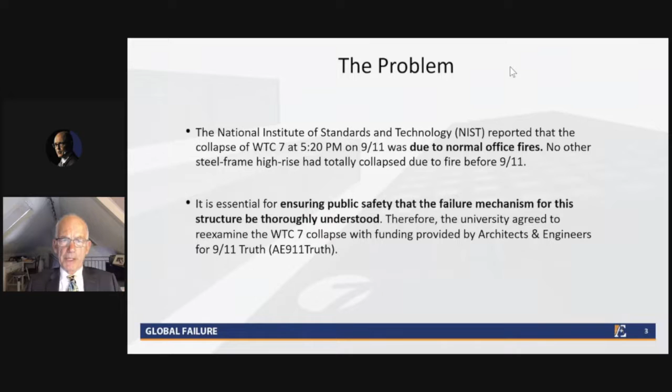The reason we wanted to study this building is because there was a serious problem. The National Institute of Standards and Technology reported that the collapse of the building at 5:20 that day was due to normal office fires. However, no other steel-frame high-rise had totally collapsed due to fire prior to that date or since. So it's essential for ensuring public safety that the failure mechanism for this structure be thoroughly understood. The university agreed to re-examine the collapse, and we provided the funding.

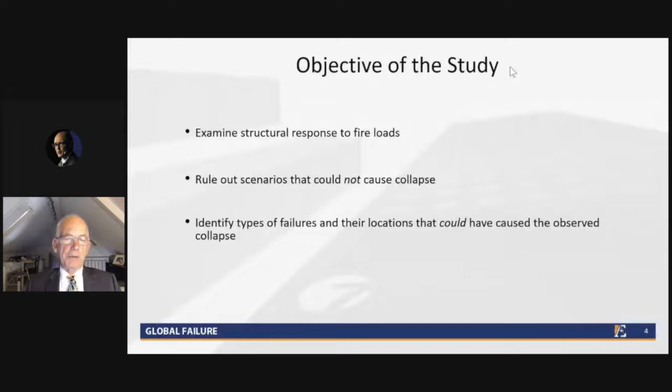The study had 3 objectives. First, examine the structural response to the fire loads. Second, rule out scenarios that could not cause the collapse. And third, identify the types of failures and their locations that could have caused the observed collapse.

The material properties utilized were the same that NIST used, and we validated those: A36 steel, A572 steel, and 3,500 psi concrete.

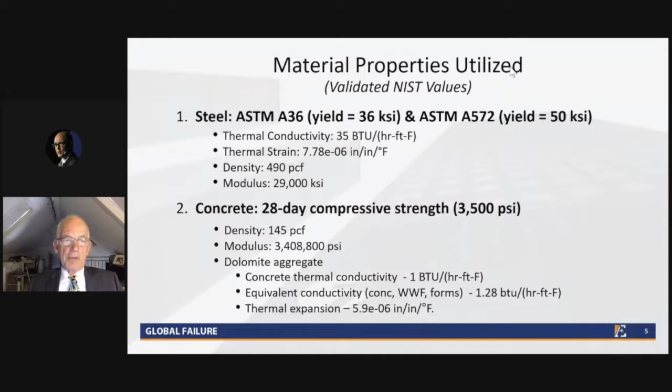The methodology used three approaches: simulate the local structure response to fire loading on floors 13 and below where the fires were; examine the collapse initiation hypothesis developed by NIST, as well as collapse hypotheses advanced by private engineering firms whose studies were commissioned as part of litigation related to the collapse; and third, simulate several scenarios within the overall structural system to determine what type of local failures and their locations may have caused the total collapse to occur as it was observed.

There were two official reports on the building failure. FEMA issued a report in May of 2002, which was a preliminary report that just reported on the evidence that had been found and suggested some possible avenues of investigation. NIST issued their report, as Richard mentioned, later in 2008.

In addition, there were privately funded reports for the lawsuit. The Arup Group issued a report for the plaintiffs, Con Edison and their insurance company, in their lawsuit against WTC 7 Properties. Their report was released with the publication of the Second Circuit Court of Appeals decision in December of 2013, ruling in favor of the defendants.

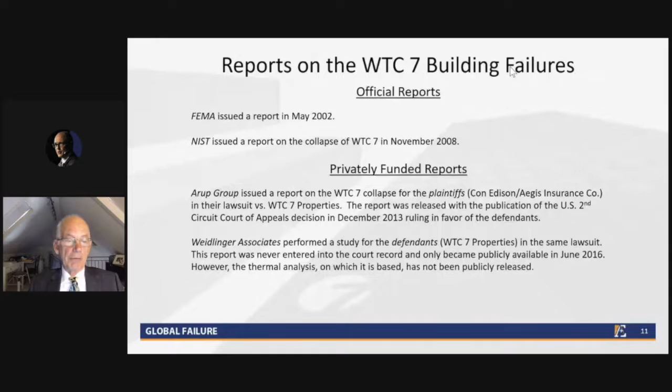The Weidlinger Associates performed a study for the defendants in the same lawsuit. However, this report was never entered into the court record and only became publicly available in June of 2016. The thermal analysis on which it was based has not been publicly released. Then there's our study, funded by AE 911 Truth, performed by the University of Alaska Fairbanks Department of Civil and Environmental Engineering, and that report was just released.

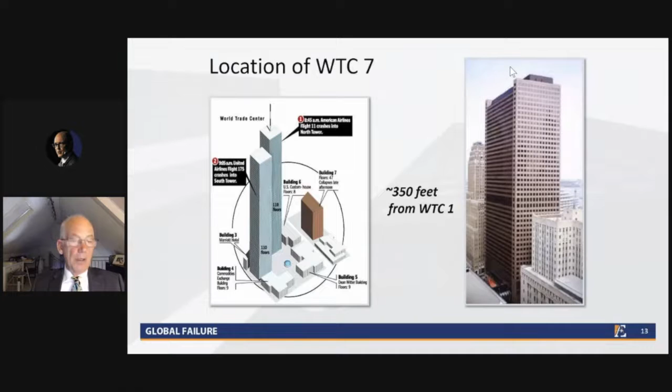The building was located about 350 feet north of World Trade Center 1. It was a 47-story high rise. Each floor was about 1 acre in area. Here again, we see it from the north.

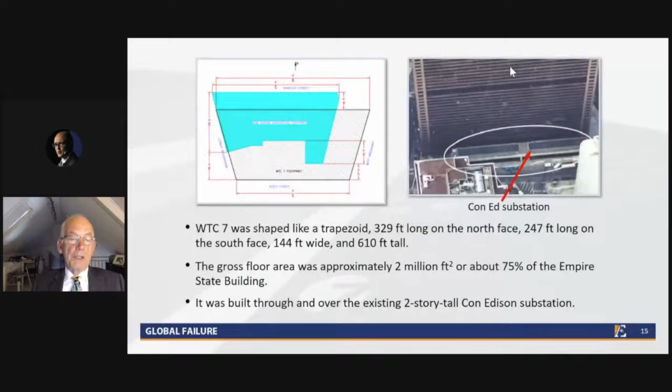It was shaped like a trapezoid, with the long side on the north side of the building and the short side on the south side. That's important to remember. It was built over the Con Edison substation, a 2-story high building that they erected the building over.

The foundation caissons, some of them went through the Con Edison substation, and some of them attached to the caissons that were already through the Con Edison substation.

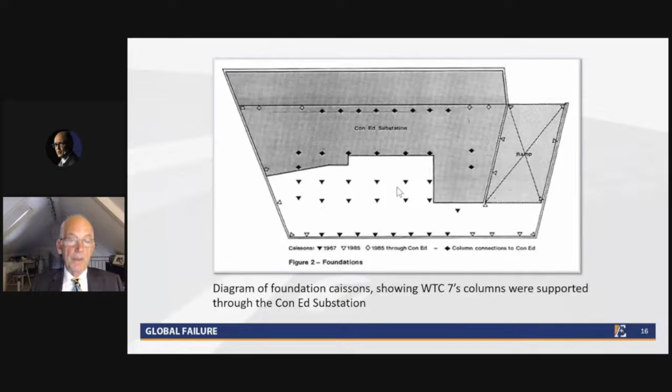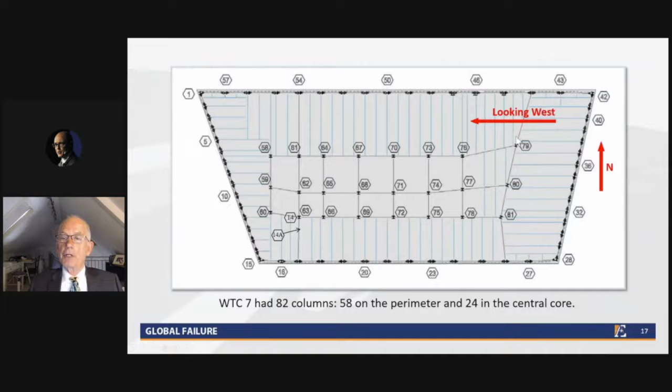During construction, we can see the arrangement of the columns here, the perimeter columns, the girders that connect the perimeter columns, and the framing between the perimeter girders and perimeter columns. The core columns are here, and they surround the area of the elevators and the stairwells.

The core columns and the perimeter columns are connected by a steel deck, with concrete covering.

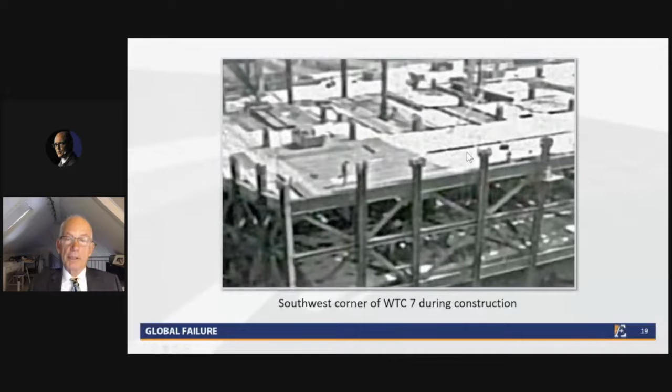7 hours after the Twin Towers came down, the building, which wasn't hit by a plane, collapsed and turned into a 5-story pile of rubble in about 7 seconds. Notice again, this is from the south, so here's the east penthouse, the west penthouse.

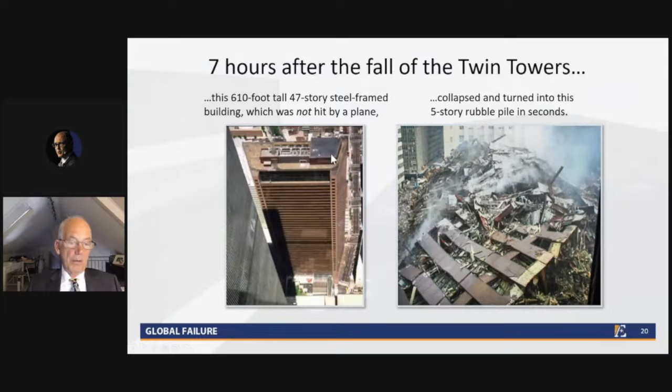In this series of videos, these were started after the west penthouse had fallen through the roof of the building. When this video starts, the penthouse is already gone. That's true in all the videos we're going to watch here. We'll see a longer video later that shows the entire process, but this shows the building coming down.

For the third time today, it's reminiscent of those pictures we've all seen too much on television before, when a building was deliberately destroyed by well-placed dynamite to knock it down.

Did they actually use the word brought down, and who was it that was telling you this? The fire department, and they did use the word, we're going to have to bring it down.

We heard this sound that sounded like a clap of thunder. It looked like there was a shock wave ripping through the building, and the windows all busted out. About a second later, the bottom floor caves out. The building followed after that, and we saw the building crash down all the way to the ground.

And I turned in time to see what looked like a skyscraper implosion. Looked like it had been done by a demolition crew. The whole thing just collapsing down on itself. It was almost as if it were a planned implosion. It just pancaked.

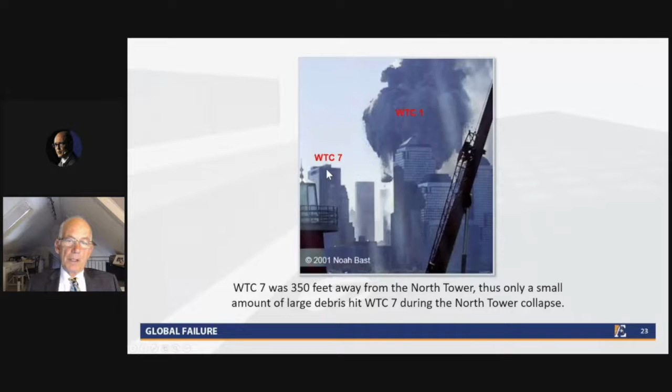The light debris from Building 1, the North Tower, hit the southern face of Building 7. FEMA mapped that debris pattern here, and we can see that some of it did, in fact, impact the south wall of Building 7.

NIST gave us a pictorial view of that damage as they interpreted it. There was damage in the lower southwest corner of the building and some damage to the upper floors on the middle of the south side. NIST stated that this debris damage had little effect on initiating the collapse.

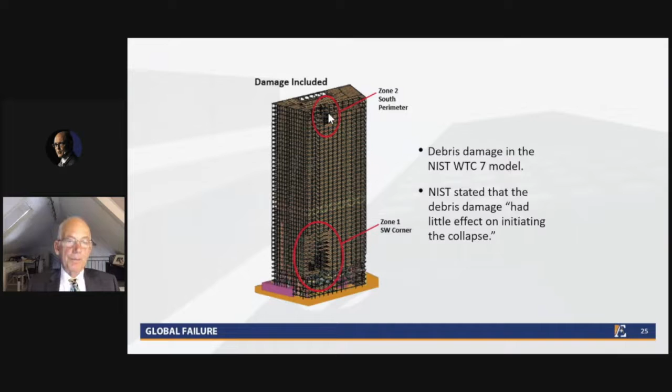Some photos taken during that afternoon. Here's one at 2:11 of the east wall of Building 7, and here's one at 3 o'clock of the north wall. We can see the fires are active at that time.

FEMA thought that maybe there was diesel fuel involved in the fires. There were some auxiliary generators for backup power on the 5th floor. These were louvers for that air intake, and there was no smoke coming out of that. So the conclusion was that the diesel fires had nothing to do with the collapse of the building.

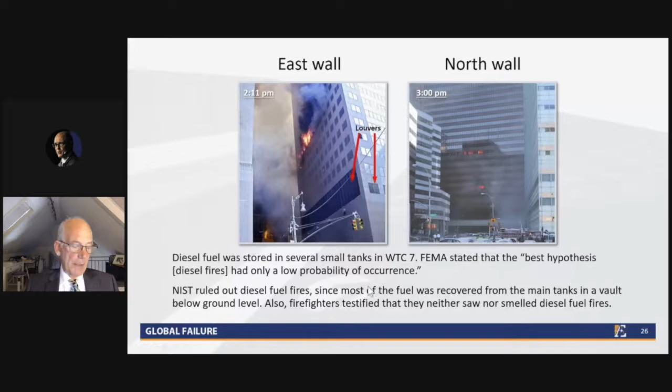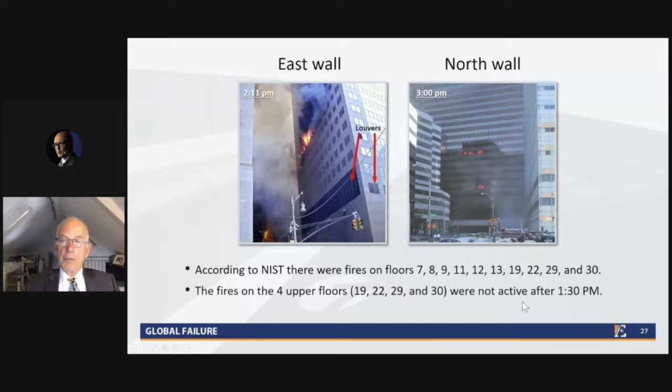NIST claims, and the evidence shows, that there were fires on the 7th, 8th, 9th, 11th, 12th, 13th, 19th, 22nd, 29th, and 30th floors. However, the fires on the upper 4 floors were not active after 1:30 p.m. and were thought to have nothing to do with the collapse of the building.

This is a view of the north face of the building, taken about 90 minutes before it collapsed. We can see that there are fires active on the 8th floor here, apparently working its way from west to east. Up on the 12th and 13th floors, we can see that fires are still active. On this floor, the fire is working its way from east to west, and same thing apparently with the 13th floor. We can see that there's still some fires active around column 44, which is of interest to us.

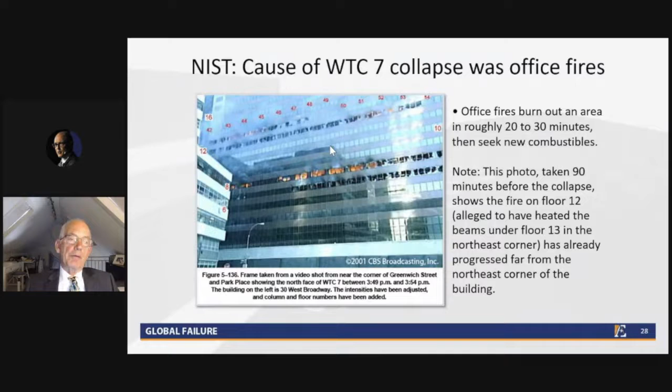It's important to remember as far as office fires go that they depend upon office furnishings for their fuel, and they burn out areas in roughly 20 to 30 minutes because they run out of fuel. So they have to move. And we see that that's what's happening here.

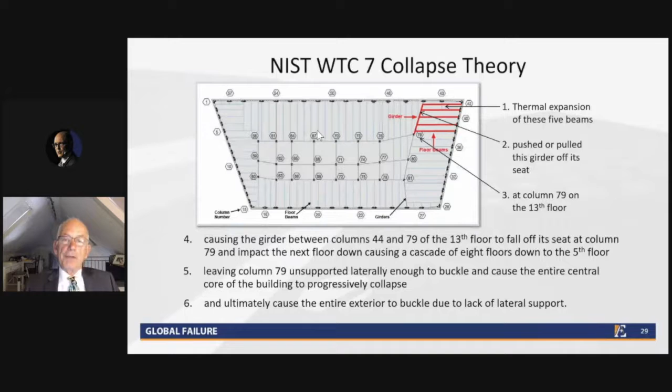The NIST collapse initiation theory starts with the 13th floor, in the northeast corner of the building, with these 5 beams that frame into this girder, A2001, that runs between column 79 and column 44. They say that the thermal effects on those beams cause them to expand and contract later, and that either pushed or pulled this girder off of its seat and caused it to collapse.

That collapse on the 13th floor caused the girder to hit the 12th floor down, and that in turn caused a cascade of these beams in this area all the way down to the 5th floor, causing column 79 to buckle because it was unsupported for such a long distance. That in turn led to the buckling of 80 and 81, and these 3, 76 through 78, buckling, with the collapse proceeding from east to west of all the core columns, which then resulted in the collapse of the perimeter columns, leading to the global collapse.

So that's their theory. It's a progressive theory. In other words, one event, the expansion of the beams, led to another event, the pushing off the girder, led to another event, the falling of the floor, led to another event, the cascade of floors, led to another event, the buckling of column 79, and then the buckling of adjacent columns, and then the buckling of all the perimeter columns. A progression of events, an initiating event.

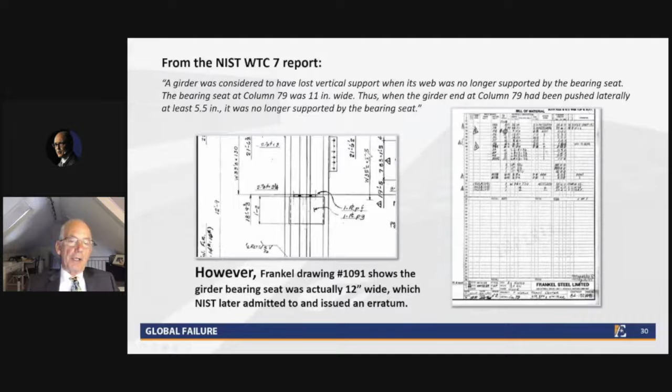We're going to look at that analysis. Their report said that the initial event was the girder, A2001, being pushed off of its seat at column 79. This is the drawing of column 79 and shows the beam, the girder seat, which was supported by a plate that was welded to column 79, being attached to the column.

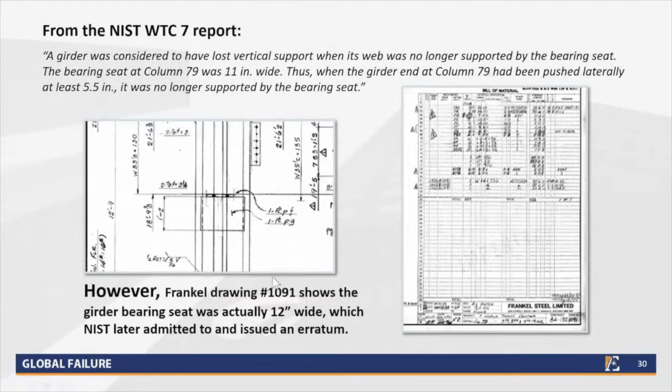They said that that seat was 11 inches wide, only 11 inches wide. However, the bill of materials and later investigation showed it was 12 inches wide, which is a somewhat important fact considering that they're saying the girder was pushed off of that seat. So that's why that's important.

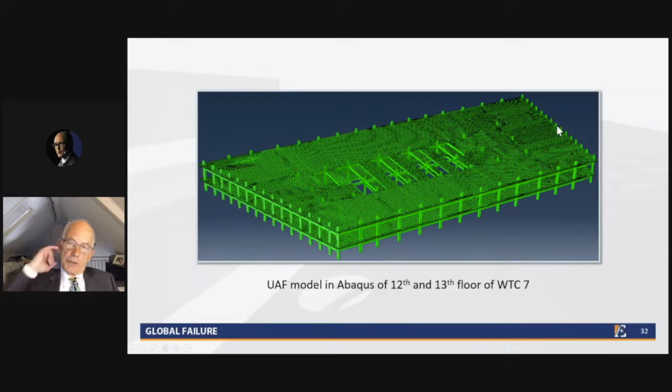Now that assumption that NIST made runs counter to the findings that Professor Hulsey had. So that's an important fact to remember as we go on and investigate the differences.

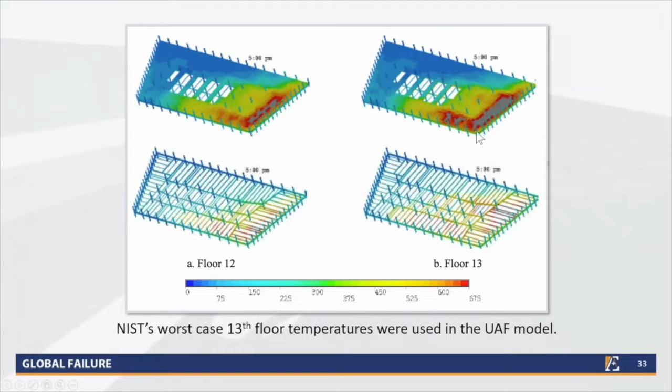Here's the worst case floor temperatures that were used for the 12th floor. NIST shows these temperatures, which are color coded. You can see that their maximum temperature down here is about 675 centigrade, which is over 1200 degrees Fahrenheit. Then this is the floor framing underneath that concrete pad, and same thing for the 13th floor here. You can see that in both cases, the maximum temperature that NIST found was in the area of the eastern part of the building.

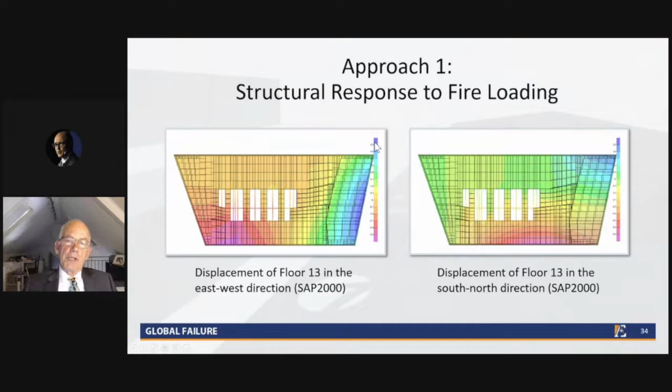In approach 1, the UAF team looked at the structural response to the fire loading. The displacement of the 13th floor in the east-west direction is shown here. The purple is the greatest displacement, and we see that occurred on the east end of the building. In other words, the UAF team found that this wall moved about 5 inches or more to the east.

That's in contrast to NIST. Remember, they said that whole perimeter wall remained fixed. When we look at the north-south direction, we see that the maximum north direction was about 3.5 inches in the UAF model, and that occurred in the northeast corner of the building.

They used 2 different finite element models to mimic the behavior of the building. The SAP 2000 analysis showed that the X displacement, in the east-west direction of the floor at column 79, was almost 2 inches, about 1.9 inches. And in the north-south direction, it was about 3/4 of an inch to the north.

So in other words, they're saying that the floor displacement at column 79 was about 2 inches to the east and about 3/4 of an inch to the north. They also found that the westward displacement of the girder relative to column 79 was less than 1 inch, which differs substantially from the 6 1/4 inches of westward movement found by NIST.

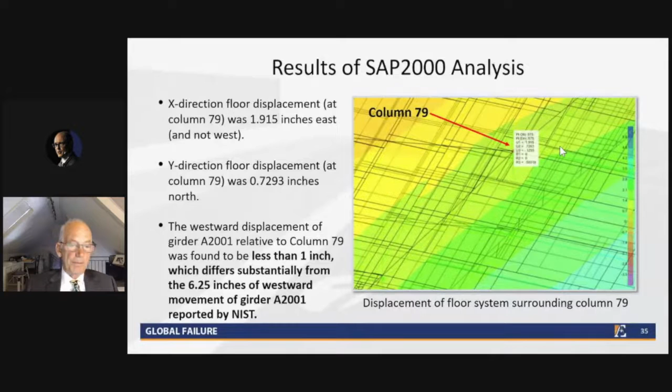The ABAQUS analysis, which was used to check the SAP 2000 analysis, so that we could compare and see if we're getting consistent results, showed that the X direction of the floor displacement was 1.85 inches, and in the north direction was 0.94 inches. That's very close to what the SAP 2000 results were.

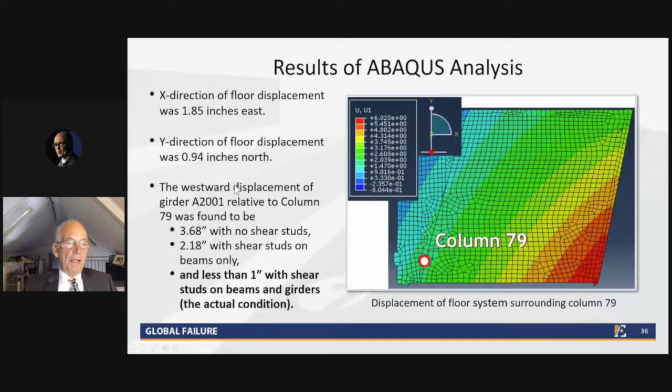It's found that the westward displacement of the girder relative to column 79 was 3.68 inches with no shear studs on the girders or the beams, 2.18 inches with shear studs on the beams only, and less than 1 inch with shear studs on both the beams and the girder, which was the actual condition.

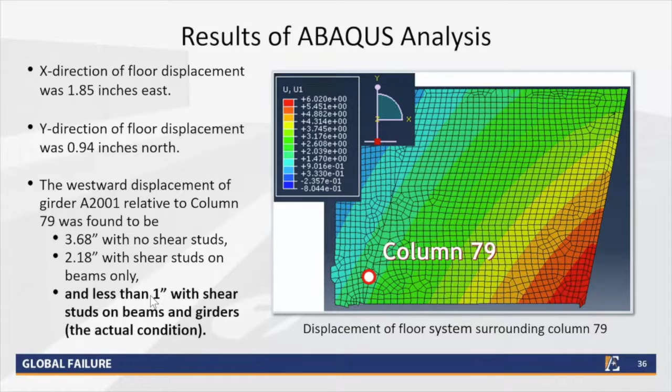The reason why those other modalities were examined was because there were some claims by NIST and other examiners as to whether or not there were shear studs on the beams and on the girders, and that made a difference on how the structure reacted.

The ABAQUS analysis was checked against the NIST boundary conditions with no spatial restrictions, and found that the westward displacement of the girder relative to column 79 was 5.11 inches. This was an attempt to replicate NIST's findings.

But we found it was a full inch less than the 6.25 inches of westward relative displacement that NIST reported, and nearly an inch less than the 6 inches westward displacement, which would have been required to push the web of A2001 past its 12-inch seat at the column. So we were unable to replicate NIST's results, probably due to the difference in input values and assumptions.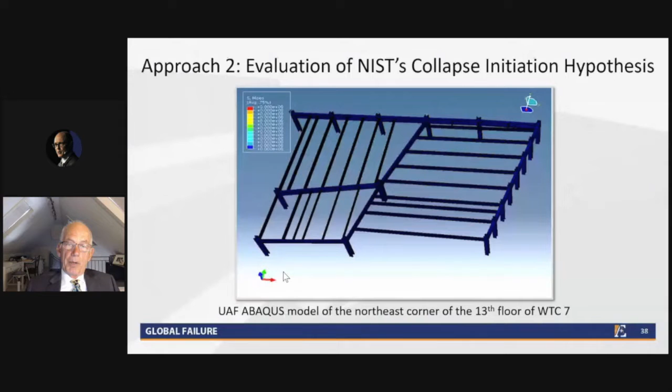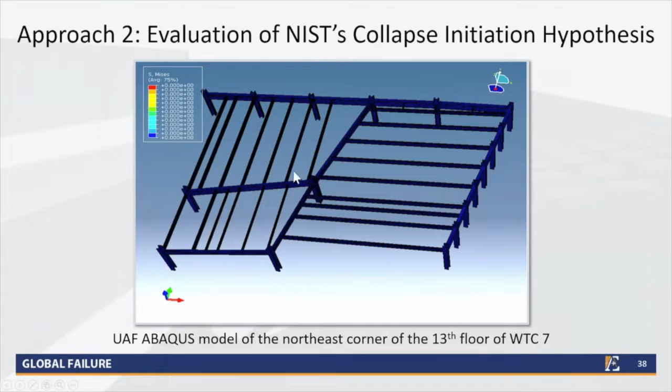Second approach was to evaluate NIST's collapse initiation hypothesis. Here we see the ABAQUS analysis: column 79, girder A2001, column 44, the 5 beams, and the 2 girders framing in from the west and from the south.

Looking at column 79, we see that it had 2-inch thick side plates that were welded to the column at the 13th floor, and they protruded past the corners of the column by 1.8 inches on each corner.

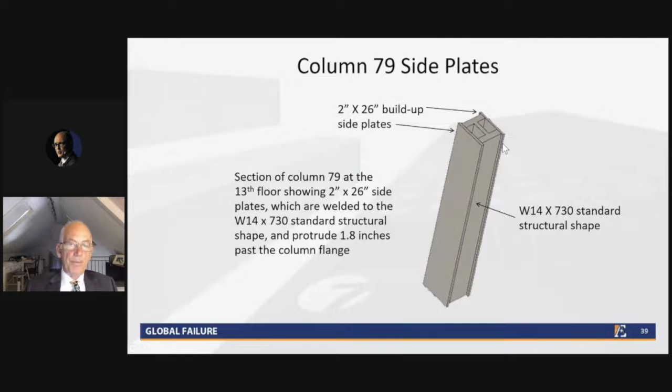The ABAQUS analysis of UAF showed that with the beams heated to 600 degrees Celsius, and the girder heated to 500 degrees Celsius, the beam would push the girder to the west, but the girder would elongate and be trapped behind the side plates. Somehow NIST doesn't take those side plates into account. Although they showed them on some of their drawings, they don't explain how it got past the side plates.

So that's the first problem. Second problem is that the girder, as shown in the NIST report, looks like this. Here's the web, here's the bottom flange, it's attached with some clips, and here's the seat underneath it supported by

its plate. The problem with that drawing and that replication is that there was a 3/4 inch thick stiffener plate welded to both sides of the web, and you can see that here. Welded all the way around to the web and to the flange, the bottom flange. Well, that's going to make a big difference on how that girder is going to behave when it's pushed to

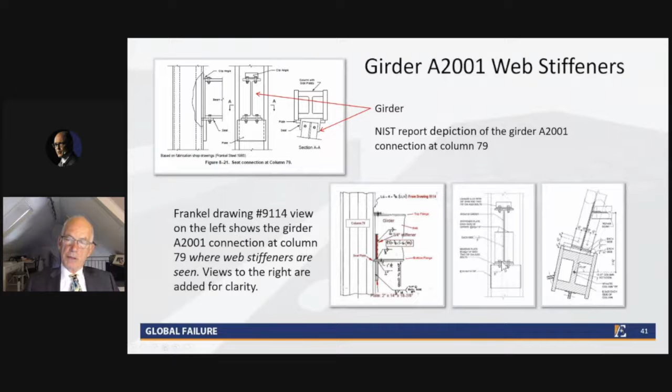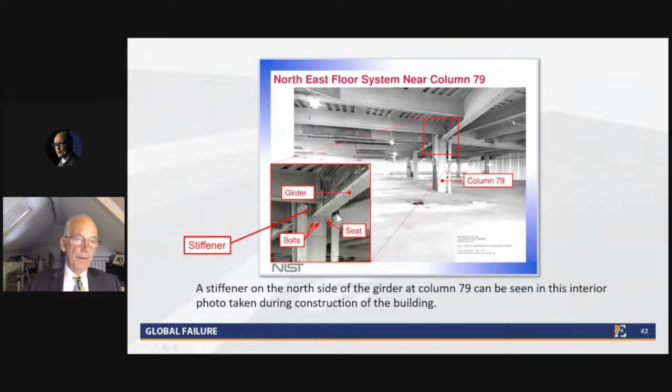the west, because the NIST analysis depends upon this flange folding up due to lack of stiffness when the web moves past the corner of the seat. However, putting those stiffeners in there makes a huge difference in the strength of that bottom flange, so the curling up wouldn't occur. We know that the stiffener was there because there are photographs taken during construction showing the stiffener welded to the girder. Here's a graphical representation: the girder, the column, the stiffener plates, the beam framing into the girder, the girder seat, and the plate that's welded to the column.

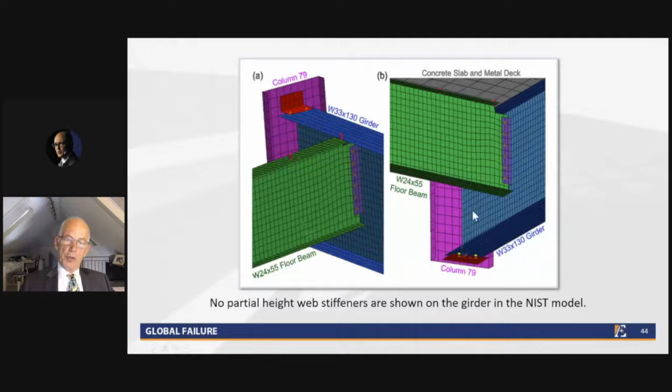The NIST analysis left the stiffeners off. So here we see their analysis: the beam, the girder, the column, and here we're looking at it with the column removed, and there's no stiffener plates on the girder. They admitted that they left the stiffeners off because they said that the web crippling, which they were designed to stop, didn't occur. So they didn't need to include the stiffeners in their models.

Now that is an analysis that would not stand up in any engineering class, and I'm sure that that's why they had Michael Newman, a public affairs officer, sign that statement and not an engineer.

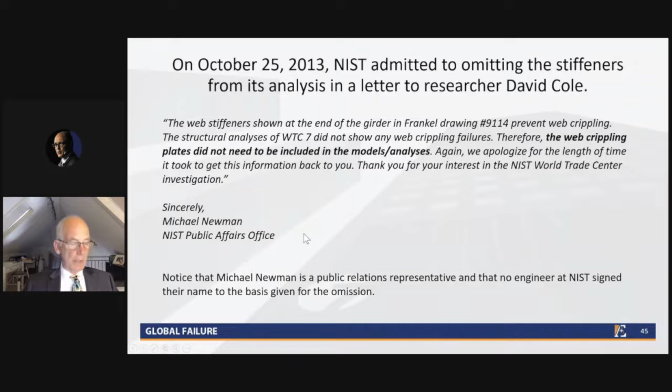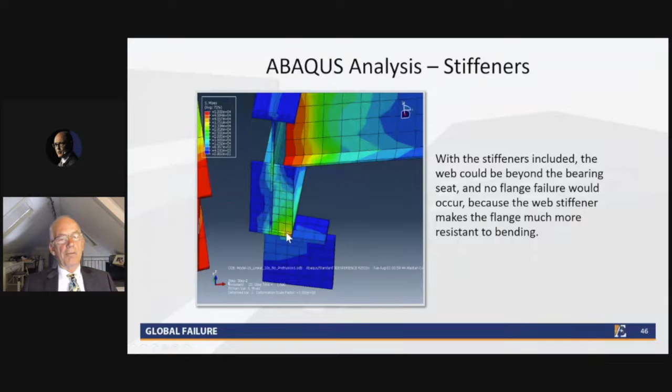We see here that in the Abaqus analysis, with the stiffeners included, even if you took away the side plate on the column, let the beam push the girder so that the web is well past the corner of the seat, the flange doesn't fail. So that's the next problem that they had.

Going further, if you allow the girder to fall, to see if the next step is going to occur, here the girder is allowed to fail, falls down, hits the 12th floor below, and it would hit the same girder on the 12th floor, A2001, near column 79 on the 12th floor.

You can quickly calculate how much force it would take to break that floor loose, and it would take 632,000 pounds of force to break that A2001 loose on the 12th floor.

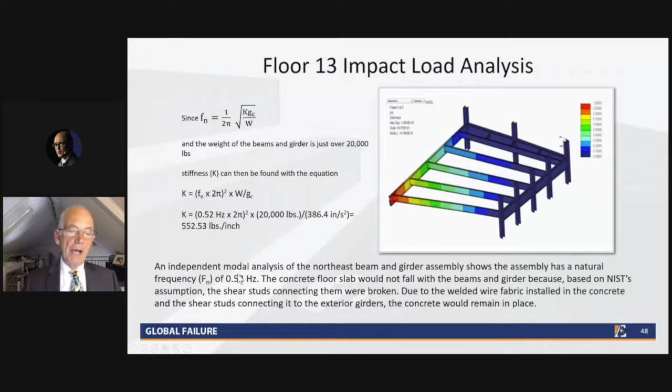When you analyze that load, you find, first of all, that the frame is going to separate from the floor slab and operate independently, because supposedly all these shear studs have been broken and it's allowed to fall. It has a frequency of about half a hertz, and utilizing that information, you can put that information into this equation and find the stiffness of this system, which turns out to be about 550 pounds per inch.

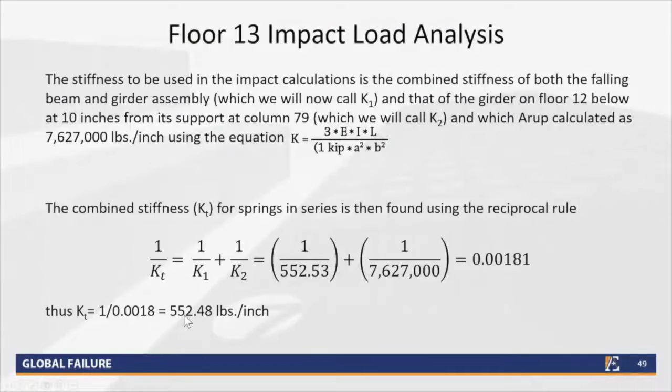And then utilizing that, you can find the stiffness of the entire system, that is the floor falling and the floor beneath it, turns out to be almost the same because the floor below it is so stiff. And then you can use the potential energy at impact of about 3.5 million inch-pounds, which was found by the Arup group, and we verified that and put that into an equation and find the deflection of the

frame system once it hits the lower floor. It turns out to be about 112 inches. And then using that, you can calculate the impact force, which turns out to be about 62,000 pounds, which is only about 10% of what you would need to break the welds loose at the girder support plate below. So this would indicate that the 12th floor below would not fall and the cascade couldn't happen.

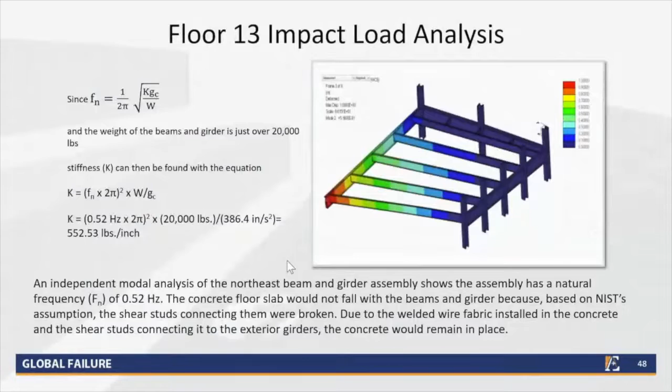Now, it's important to note that the NIST report kind of hedged its bets here and said that, well, maybe it wasn't the floor below, that it wasn't the girder below that fell. Maybe the other girders were knocked loose. In other words, the south girder coming into the column or the west girder coming into the column.

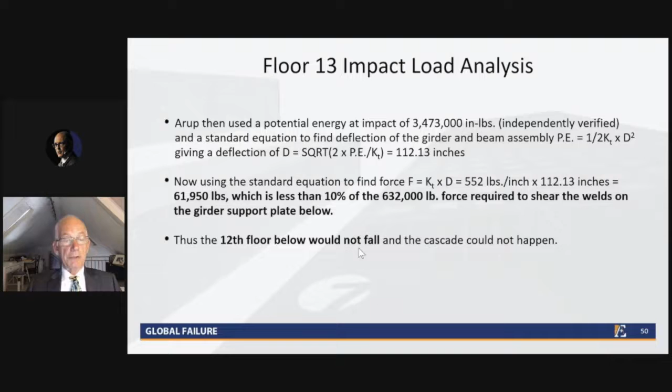They even had a scenario where the south girder coming into the column broke loose at the 14th floor, but they don't provide any information to explain how those connections failed. And without an explanation, those scenarios are not credible.

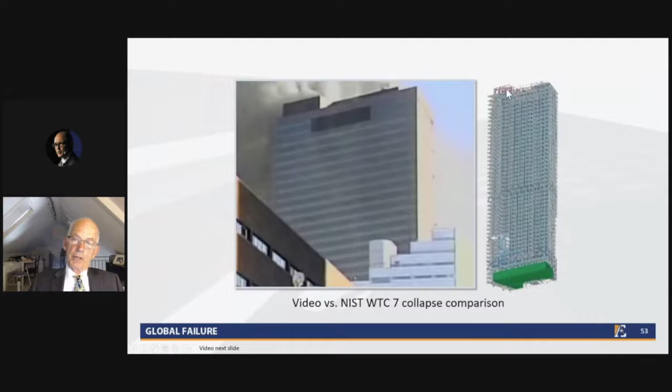Now we'll compare that to the NIST simulation. On the right, you'll see their simulation starts with the collapse of these floors down here in the northeast corner of the building, low down at the 13th floor, and watch how that affects the east penthouse up above. That's very important. There's the collapse. The east penthouse falls through, then the west penthouse, and then the building starts to collapse.

However, the NIST simulation doesn't go any further than that. So it's suspect, because the building has already started to deform significantly on the exterior, on both the west side and the south side, upper and lower.

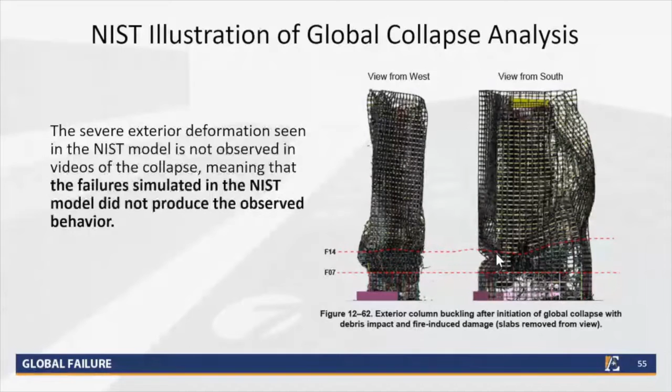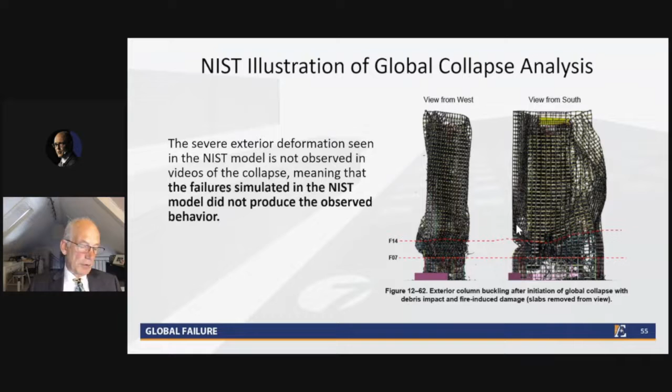In their report, they show what the view from the west would look like into the collapse, and from the south, and you can see that the distortion of their building is considerable in their model. So that doesn't match the observed collapse. It can't be used as a model to explain the collapse if it can't match the collapse.

So that is a major sticking point with the NIST analysis. How do they get that penthouse to collapse when they were collapsing the floors way down low in the building? UAF analysis said that could not happen.

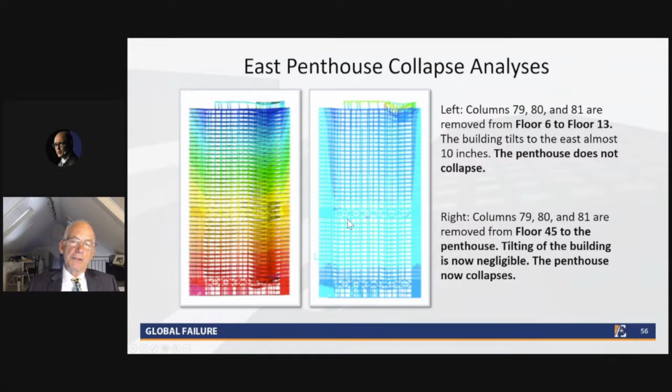Then we'll look at their horizontal core column failure scenario. They said that when these three columns fail, first 79, then 80, then 81, that would lead to a collapse of the next three columns, 76, 77, and 78. And that would in turn set off a progressive collapse across the core columns, which would then lead to the collapse of the exterior columns.

The UAF analysis found that when you take out those six columns, 79 through 81 and 76 through 78, what happens is that these columns here in the southeast corner of the building are overloaded and fail. And when they fail, that leads to further failure of some more of the east columns, one column over here on the west side, then the other core columns start to fail, and some of them even on the north side begin to fail. So they don't find the same sequence.

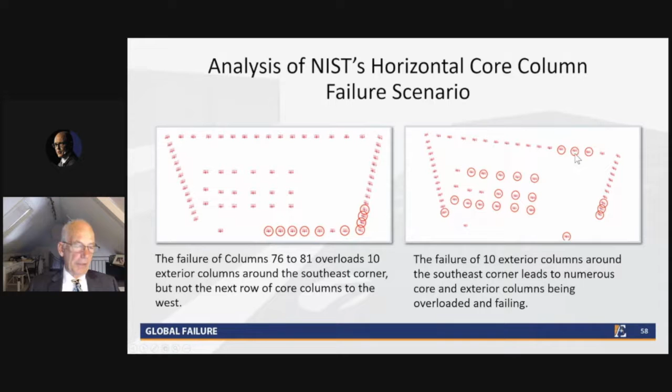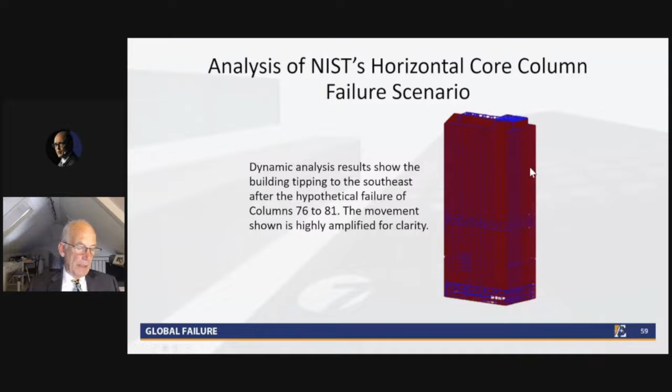When you look at how that would appear, the building would tip to the southeast after the typical failure, hypothetical failure of 76 to 81. So this analysis shows that the failure would not look like the failure that actually occurred. It would look like this.

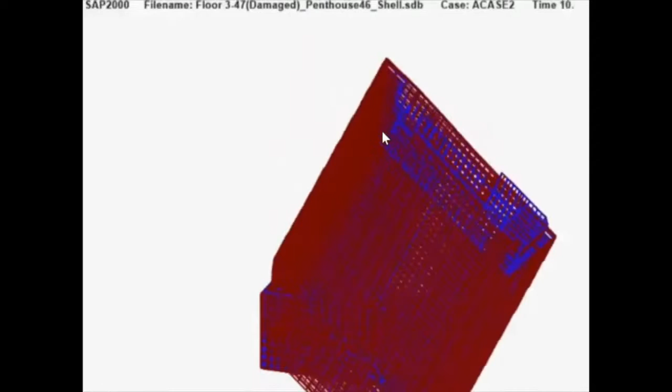Notice that the east penthouse is still intact. The building falls over to the southeast. So even if you gave NIST their collapse initiation hypothesis, of the girder falling off and the floors collapsing and the column collapsing, you don't get a scenario that looks like the building when it actually collapsed. The building would fall over to the southeast.

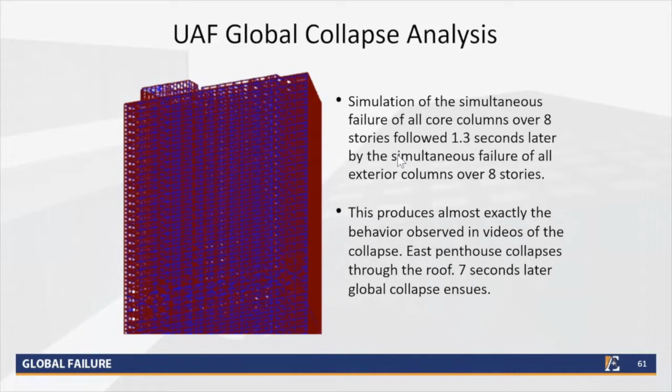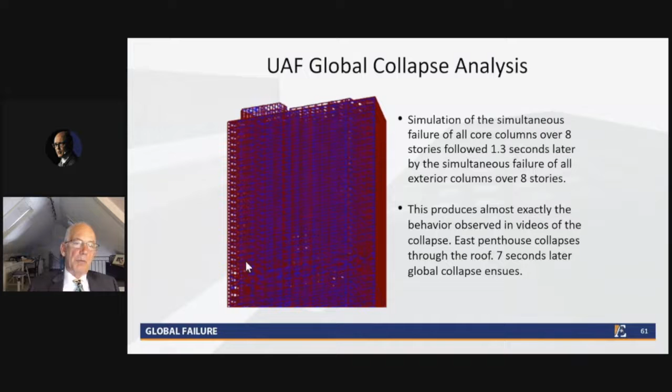The UAF global collapse analysis said you had to simulate the simultaneous failure of all the core columns over 8 stories, followed 1.3 seconds later by the simultaneous failure of all the exterior columns over those same 8 stories, to produce exactly the behavior observed in the videos of the collapse. Now the east penthouse has to collapse through the roof 7 seconds later, and then global collapse ensues. So what you have to have is a separate event up here: columns 79 through 81, which supported the east penthouse, have to collapse up here first, and then the global collapse down low of all the core columns, and then the perimeter columns 1.3 seconds later. If you do that, you can get the collapse the way it looked in the event. So let's do that.

There goes the east penthouse. The columns underneath it failed. Then the core columns down low fail, and then the perimeter columns fail, and the whole thing drops. One more time: east penthouse, and the west penthouse when the core columns collapse, and then the entire building coming down. So that was the only way UAF could replicate the appearance that the actual event showed us.

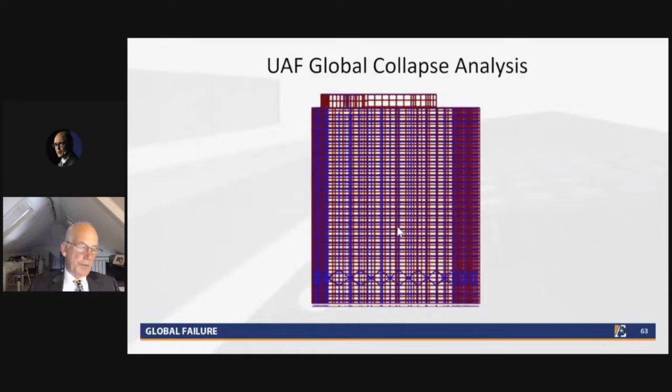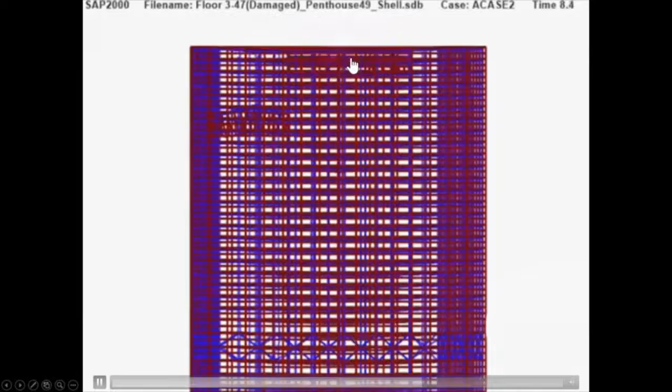Here you see it from another view. East penthouse, west penthouse, and then the building. There's a long gap between the east penthouse failure, 7 seconds, and the rest of it.

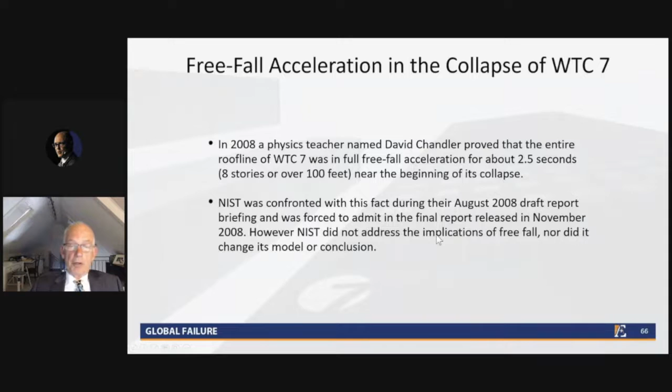So the next question we addressed was free fall acceleration, because physics teacher David Chandler proved that the entire roof line of the building was in full free fall acceleration for about 2.5 seconds, which is how long it would take to fall 8 stories. NIST was confronted with this fact in their preliminary draft report in August of 2008, and they were forced to admit in the final report that it did fall for 2.5 seconds, but they never addressed the implications of free fall, or changed their model or conclusion.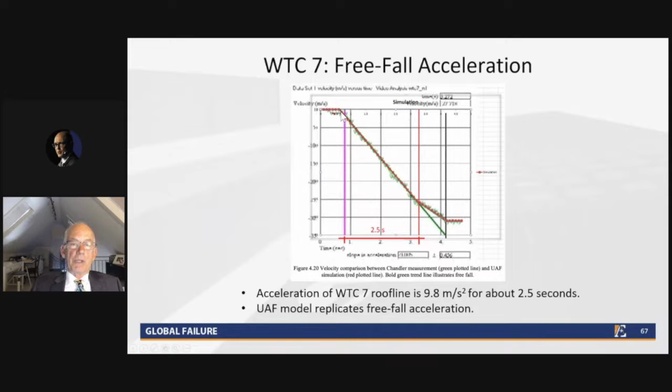Here Chandler graphed the velocity versus time, and he found that about 3/4 of a second into the collapse, it went into free fall. The slope of this line is free fall for about 2.5 seconds before it started to encounter resistance on the way down. He's going to explain that.

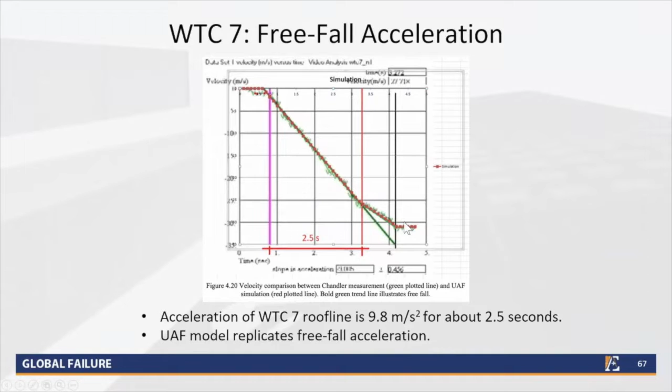Just by watching it, anybody can see that Building 7 fell close to free fall. To measure it, I used software to track the corner of the building and compute a graph of downward velocity as a function of time. The graph had a long, straight section indicating constant acceleration. Measuring the slope, I found the acceleration to be within 1% of the acceleration of gravity for the first 2.5 seconds. In other words, the building fell through its own structure with zero resistance.

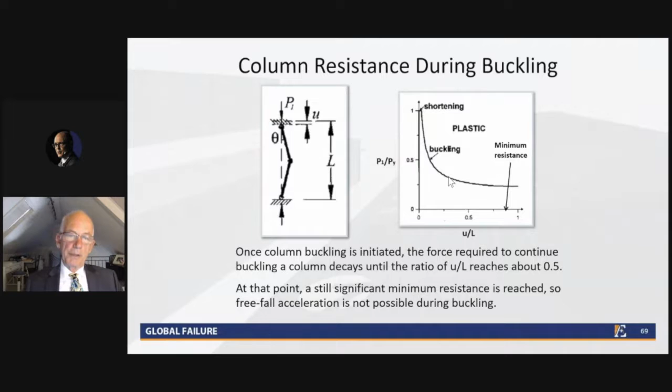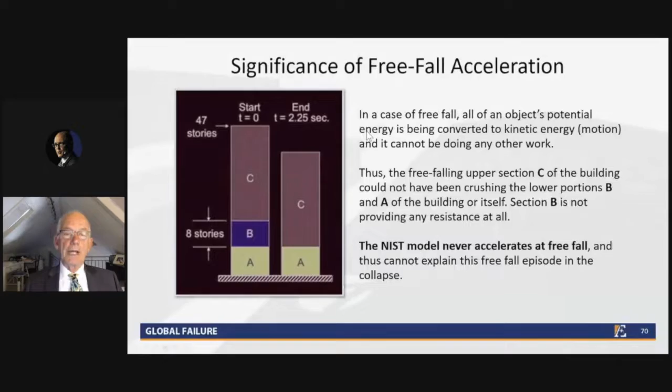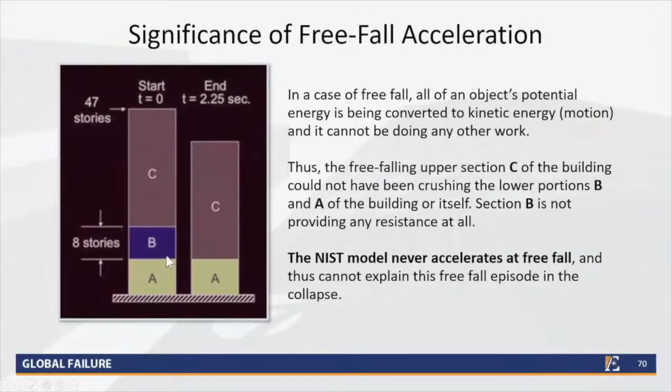In free fall, all the potential energy is converted to kinetic energy, and it can't be doing any other work. So if you take out 8 stories and they buckle, you couldn't get free fall - you have to take them out completely. The NIST theory doesn't account for that.

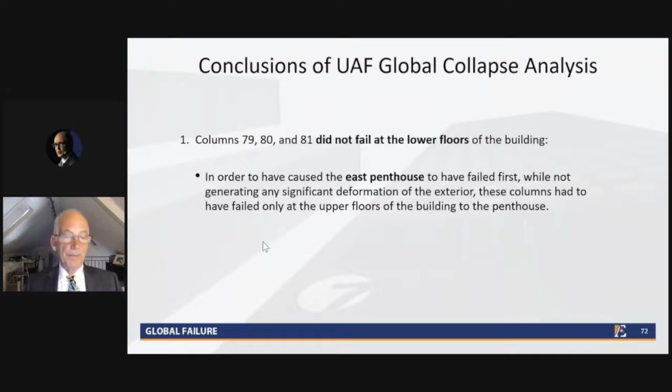So the conclusions of the UAF analysis are that columns 79, 80, and 81 did not fail at the lower floors of the building. In order to cause the east penthouse to fail first while not generating any significant deformation of the exterior, those columns had to have failed only at the upper part of the building. But there were no documented fires above the 30th floor.

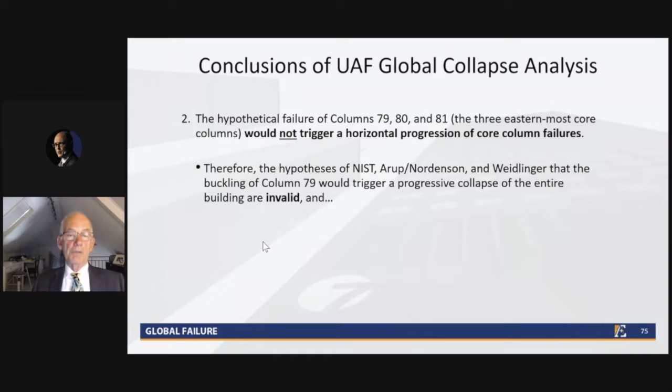Secondly, the hypothetical failure of columns 79, 80, and 81, the 3 easternmost core columns, would not trigger a horizontal progression of core column failures. So the hypothesis of NIST, Arup, and Weidlinger that the buckling of column 79 would trigger a progressive collapse of the entire building is invalid. The collapse of columns 79, 80, and 81 high in the building would have to have been a separate and distinct event from the global collapse occurring first.

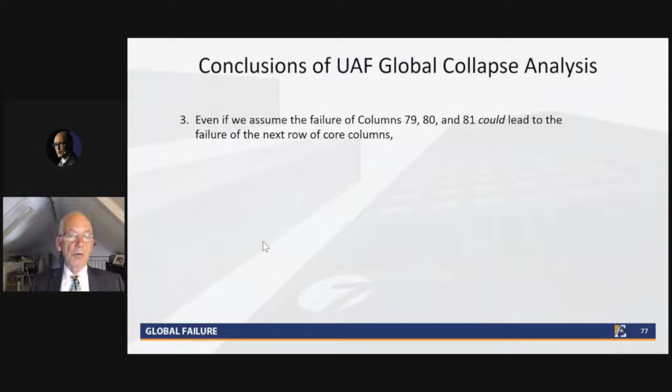Third, even if we assume the failures of columns 79, 80, and 81 could lead to the failure of the next row of core columns, the additional hypothetical failure of those 3 columns would then overload the exterior columns around the southeast corner of the building rather than overloading the next row of core columns to the west, and that would result in the building tipping to the southeast and not in a straight down collapse.

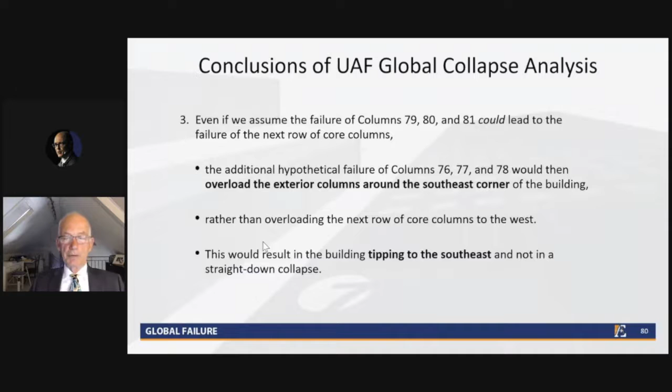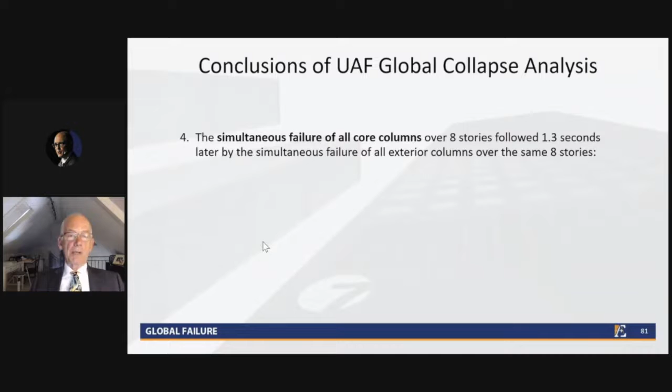Next, the simultaneous failure of all core columns over 8 stories, followed 1.3 seconds later by the simultaneous failure of all exterior columns over the same 8 stories, produces almost exactly the behavior observed in videos of the collapse. The collapse could have started on any of the various floors starting at the 16th floor and below and produced the same behavior.

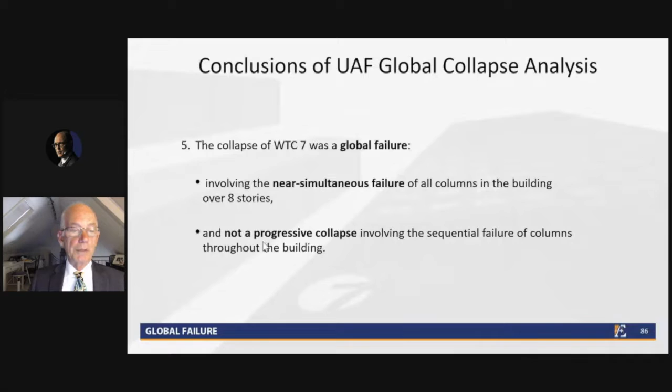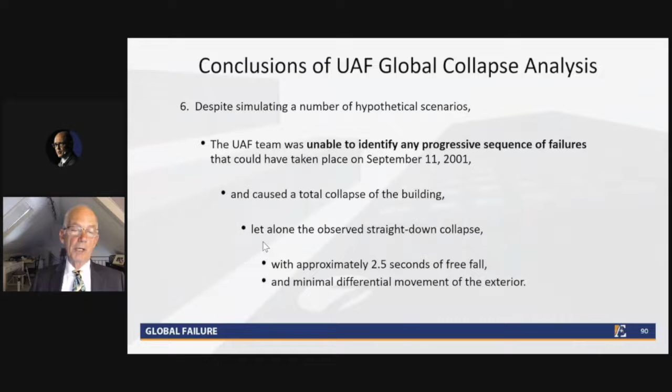The conclusions are that the collapse of World Trade Center 7 was a global failure, not a progressive failure. It involved near simultaneous failure of all columns in the building over an 8-story span, not a progressive collapse involving sequential failures of columns throughout the building. Despite simulating a number of hypothetical scenarios, the UAF team was unable to identify any progressive sequence of failures that could have taken place on September 11th and caused a total collapse of the building, let alone the observed straight down collapse with approximately 2.5 seconds of free fall and minimal differential movement of the exterior.